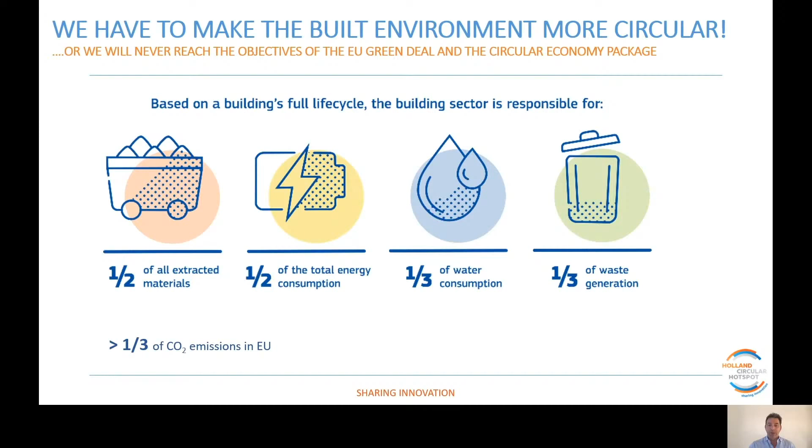Because let's face it, the built environment accounts for 50% of all extracted materials. It accounts for more than half of total energy consumption, more than a third of water consumption, a third of waste, and frankly speaking, also more than a third of carbon dioxide emissions in the European Union. We have to build back better, including the built environment.

And we think that circular economy is the way forward. Circular economy is about value preservation. Now, how could we visualize that?

Imagine that we combine materials, creativity, and energy. It's like pushing a ball up on a hill. It's about creating value with the materials we use, the products we manufacture, with the brands. Now, what typically happens is that when this material has a value, at the end of its lifetime, the value disappears. It rolls down the hill, to visualize it a bit. It's lost forever. And if you think about the plastic soup, it creates even a negative environmental value.

But what if we were to capture that value and keep that value at the highest possible level? By keeping it in circulation much longer, a longer use, or by reusing it, by sharing it. And if we can't do that, by repairing it, remanufacturing, refurbishing it. And the last thing in a circular economy is recycling, because then we're only using the material value and not the functionality. To do this, we're talking about another way of designing, another way of producing, another way of using, another way of dealing with waste. It's a system change.

Now, particularly in the Netherlands, I have to say this concept fits us very well. We had to work together in the Netherlands to keep our feet dry. Our country shouldn't exist. We had to keep our country livable. We were early industrialized, very densely populated, an agriculture superpower. We had to work together to keep our environment safe and clean. And for a country that doesn't have natural resources, it makes sense to keep materials in the loop as long as possible. It made us collaborative and it made us innovative.

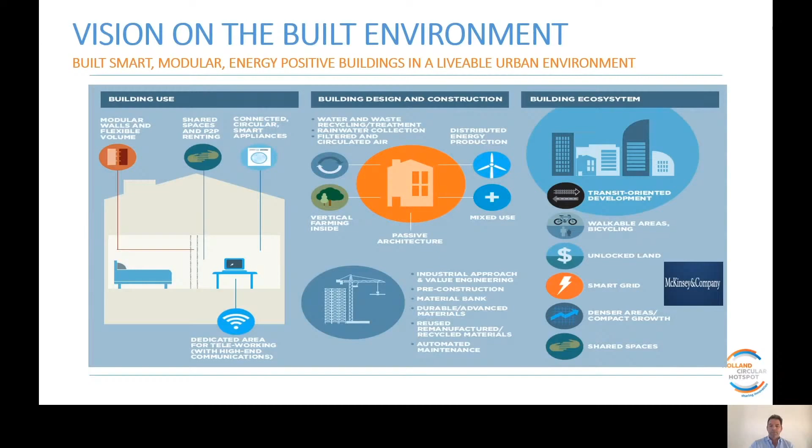Now, what does it mean? It means also that we have to focus on the overall lifetime of a building.

Typically now we focus a lot on the building phase, but if you talk about the cost, you have to talk about the total lifetime, because the usage phase determines 5 times the total building cost. In a circular design process, you look at the whole phase, not only the CapEx, initial investment, but also the OpEx, the cost of operations. By going circular, the total cost of ownership will be less and the residual value will be higher.

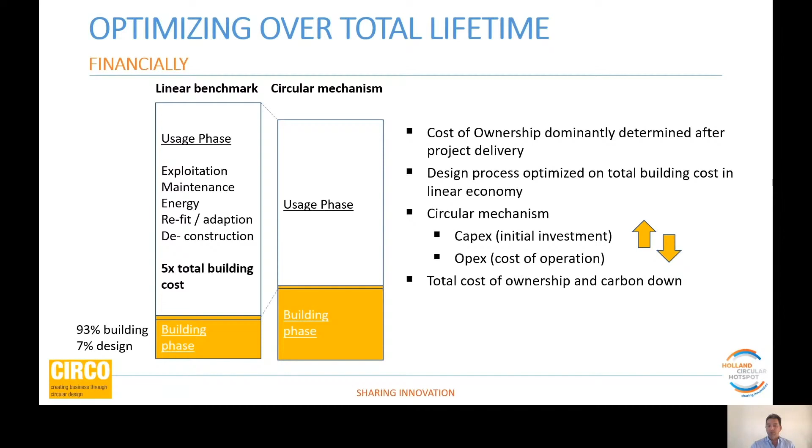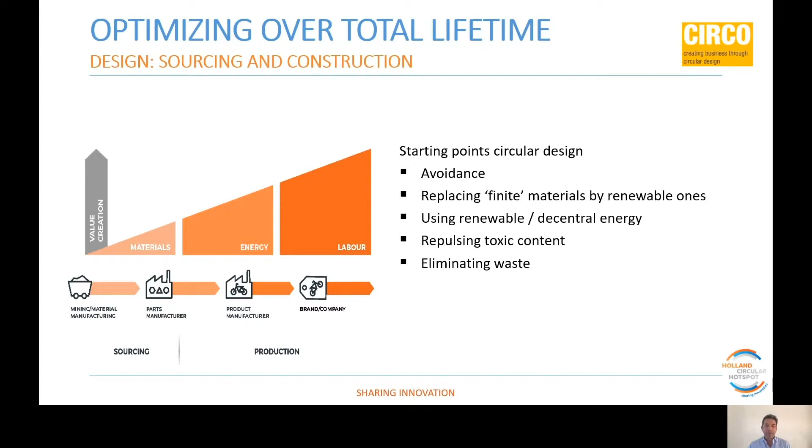What can you do in the beginning of the value chain, the sourcing and construction phase? Well, of course, you can avoid materials. You don't work with finite materials, but use renewable, bio-based materials. Your energy in the circular economy is renewable. You avoid toxic materials, which prevent making loops, and you eliminate waste right from the start.

Going further after the design, you can do lots of things as well, because in the design you can anticipate the reuse of materials and products. You make sure something can be repaired easily, that there will be effective facility services, that the building is modular, so you can change functionality if society has changed—maybe less demand for offices, but more demand for student rooms. And you implement circular business models like buildings as a service.

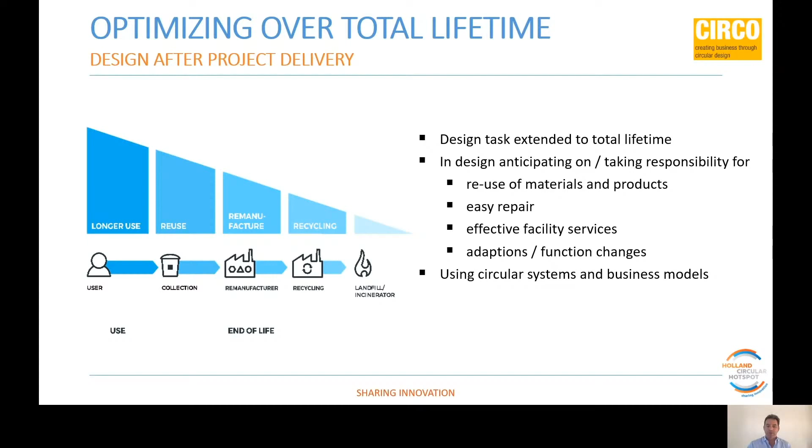We can talk a lot about this, but it will mean the concept will be different. The role of the architect will be different. It's not just the built environment—he has to think about the whole lifetime, the sourcing, the production, the use phase, and the end of life phase.

He has to communicate and create collaboration. He's a change agent, a design leader, a construction lord, an exploitation manager, and a reconstruction lord. And who knows, he might also be the data manager. So it's complete control of the whole process.

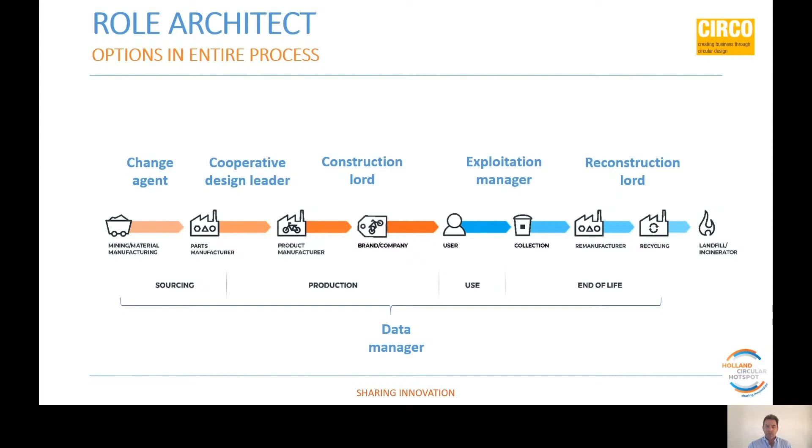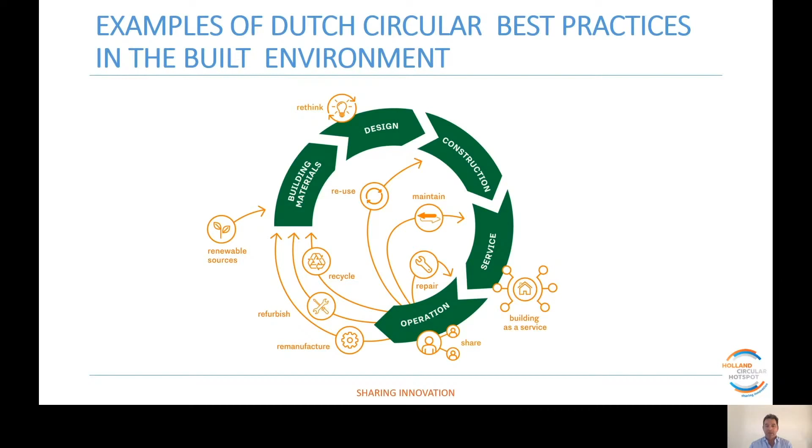We as Holland Circular Hotspot have noticed that there are examples everywhere in the built environment, from the beginning of the value chain all the way to the end: renewable materials, design best practices, buildings as a service, reuse, repair, remanufacture, refurbish, and recycling. But what's better than just sharing some examples with you?

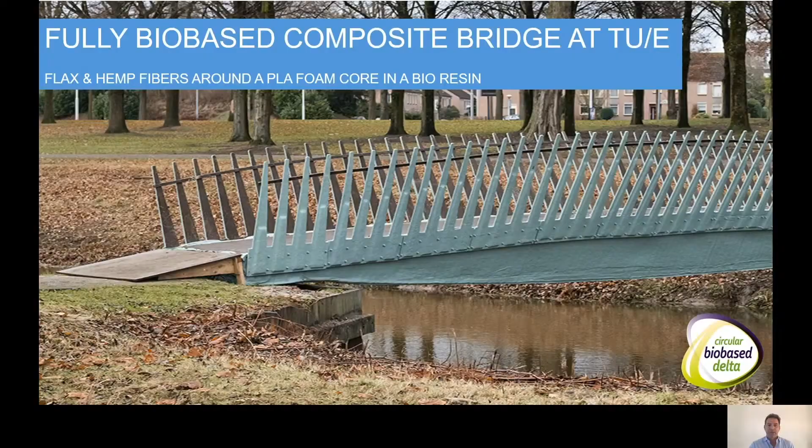Very essential if you want to think about the future are also material passports. If materials have an identity, you know where they are and can recover them. Then we're not talking about demolition at the end—we're talking about selective dismantling and reuse of materials. This is a crucial idea for the future, for keeping materials longer in circulation.

Let's go to some really fascinating buildings where they have applied circular economy in practice. This is the Venlo City Hall. It's designed according to the cradle-to-cradle and circular principles, and really, it was the first place where the architect was thinking about the whole life cycle.

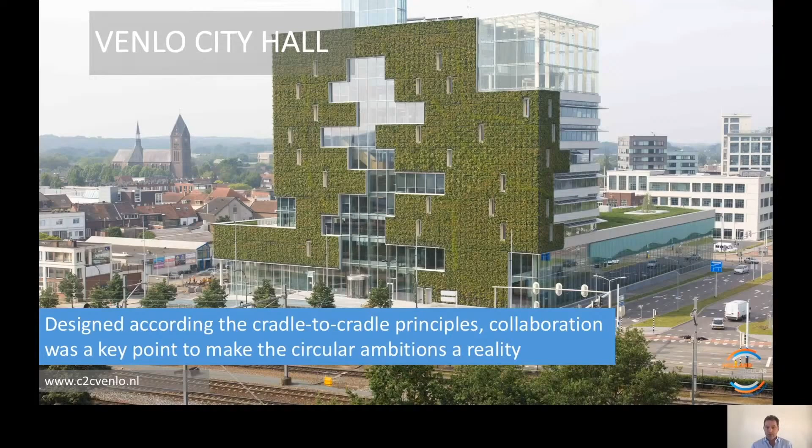This building is not only about being completely energy neutral or energy positive—it's also about the quality of life, that people enjoy working there, that there is less illness. Did you ever calculate what 1% less sickness leave would mean on your check as an owner of the building? It's fascinating. Let's move to another example.

The most sustainable building in the world is The Edge in Amsterdam, the office of Deloitte. It has the highest BREEAM score ever, combining solar energy and heat pumps to aquifers. But this building also uses intelligence—it knows when people are present and can adjust all systems accordingly, creating a combination of circular principles and energy saving.

What about the first cradle-to-cradle business park in the world? It's Park 2020, designed for dismantling. It has a material passport, light as a service, furniture as a service—everything applied here. It has one of the highest occupancy rates you can imagine for a business park. It's pleasant to work there.

It's fun. Another of my favorites is the new headquarters of Liander, from RAU Architects. They didn't tear down old buildings and build a new fancy headquarters. Instead they reused several old buildings and made a new office using 80% of the materials they could find in the old buildings, and covered all 7 buildings with a roof.

This roof is fascinating because it's based on the design of a Luna Park, since Luna Parks are designed to be dismantled after a certain time and built up again. So design for dismantling is fascinating here too. It's a very light, pleasant building with lots of green elements as well.

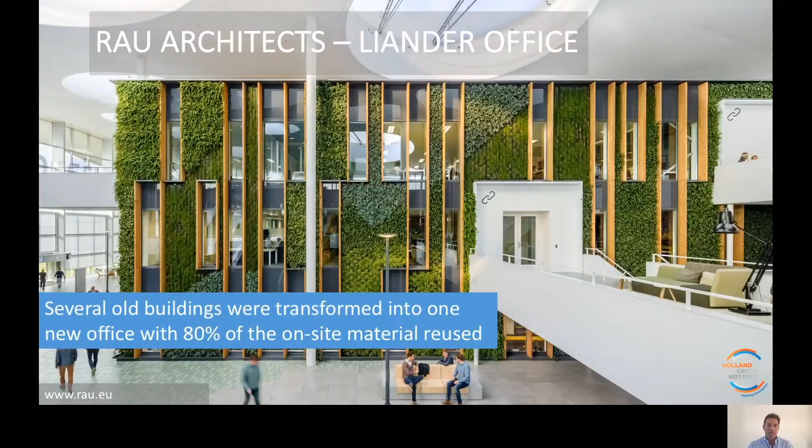In front of the headquarters of ABN AMRO, there's the Circle Pavilion. ABN AMRO is a bank with a large real estate portfolio, and they want to inspire their customers to go circular too. If you look at this building, it has a lot of circular elements—look at the wooden beams, the frame replacing concrete.

It has an elevator as a service, insulation made from old jeans, and a service concept where they use direct current instead of alternating current, saving lots of energy in transmission. Another fascinating place to be.

Of course, I shouldn't forget our own company, Holland Circular Hotspot's headquarters in Sibeta, which is a circular business center. It's a repurposed old farm, 125 years old, now an exposition room, with all kinds of circular materials—circular tapestry, circular heating—and it's an inspiration place for everybody.

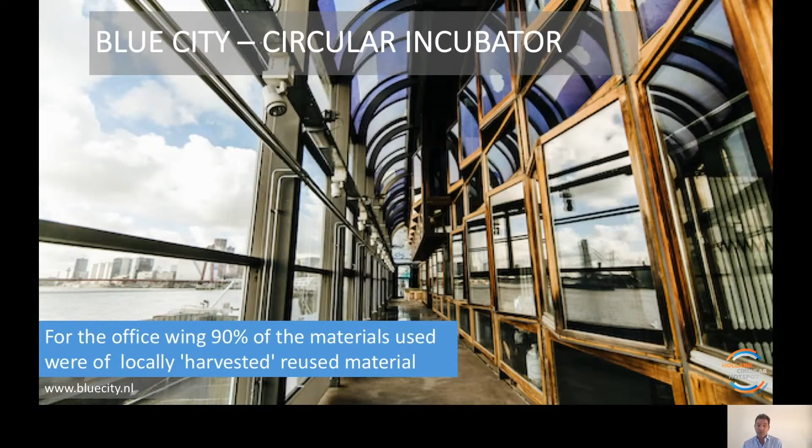Another old tropical swimming pool in the Netherlands, Blue City, has been turned into a circular incubator hub. In the office wing, 90% of the materials used were locally harvested as reused material.

We have hotels which are circular, like QO in Amsterdam. What's nice to mention is that we don't need just buildings that are a show-off for a company—we need to scale up. So what if we were to make social housing circular? Now we're experimenting a lot with that.

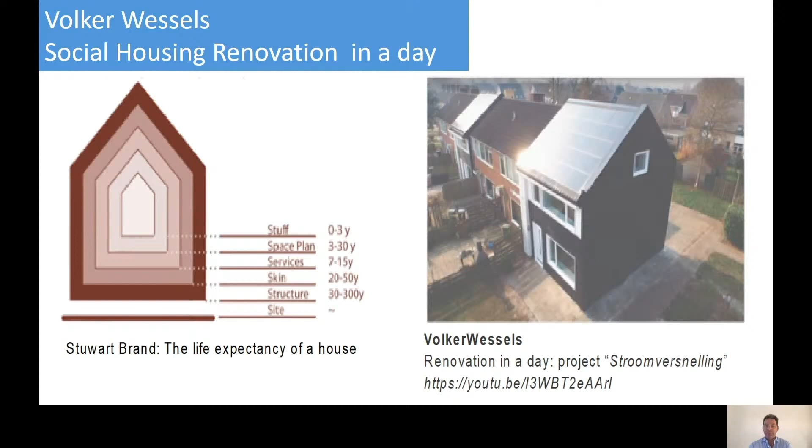If you look at social housing in the Netherlands, lots of it was built after the war, and looking at the outside of the building, it's at the end of its life and has to be replaced. In a project called Stroomversnelling, they actually replaced the outside of the building in 24 hours. It's fascinating that it can be done, and from a very energy unfriendly building, all of a sudden it's an energy neutral social housing complex.

If we enter a further phase, the waste phase, imagine jeans—I'm wearing one right now. You can wear jeans, share jeans, repair jeans, but then there comes a moment you cannot use them as jeans anymore, though they're perfectly suitable as insulation in a wall. That's what happened, for instance, in Circle from ABN AMRO, where textile fibers are processed into sound-absorbing, moisture-regulating paste applied to walls and ceilings.

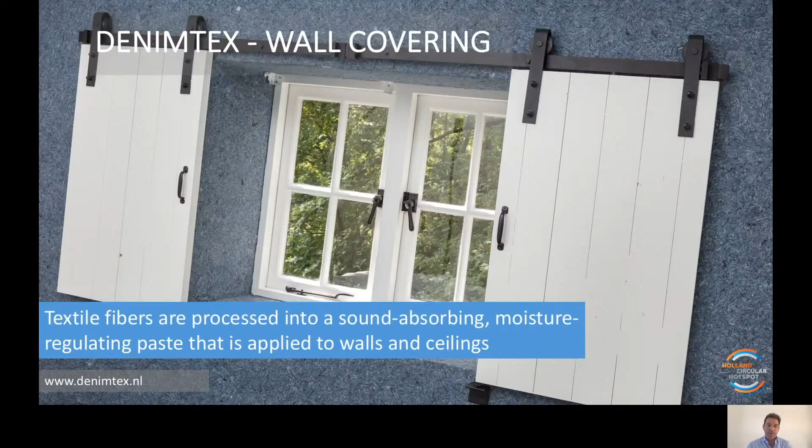Now another circular example which can have a huge impact is the smart crusher. It's about concrete recycling, especially the cement fraction, because that's the most energy intensive part. Given the building challenge we still have—the cities of tomorrow still largely have to be built—what if we could reuse cement, this energy intensive part of concrete? It would save a tremendous amount of carbon dioxide. This is definitely an innovation to follow.

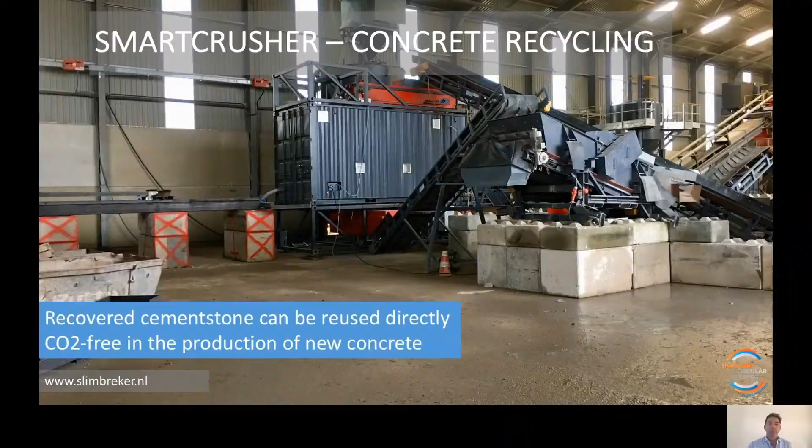Lots of examples—we have to stimulate that. We want to build back better. We want to go circular in the built environment. Wherever you go around the loop of the built environment, the value chain, there are lots of things that the regulator can do.

It's about recognizing each other's standards, tools, and labels. It's maybe about extended producer responsibility for buildings. Could buildings be part of the emission trading scheme in Europe if they are so important for carbon dioxide emissions? It's about access to financing for new circular business models, and creating a pull factor so people start to procure more circular buildings. It's about solving how waste can become a resource again by aligning waste regulation and chemical regulation.

Could we stimulate it by setting mandatory targets for recycling in buildings? Make material passports for new buildings obligatory. And it's about life cycle thinking all the time in terms of carbon dioxide, resource efficiency, health aspects, and total cost of ownership. We can do a lot, and we can do it now.

That's basically how I want to conclude, because closing the loop for buildings and materials is happening today. Front-running businesses are showing it and embracing it. It can happen in the Netherlands, it can happen in Vietnam, it can happen in Ghana, it can happen in Canada, everywhere. It's an opportunity—about future markets, about continuity—but we need to scale it up, and fast. Time is running out. We have to build back better, and we need all of you on board.

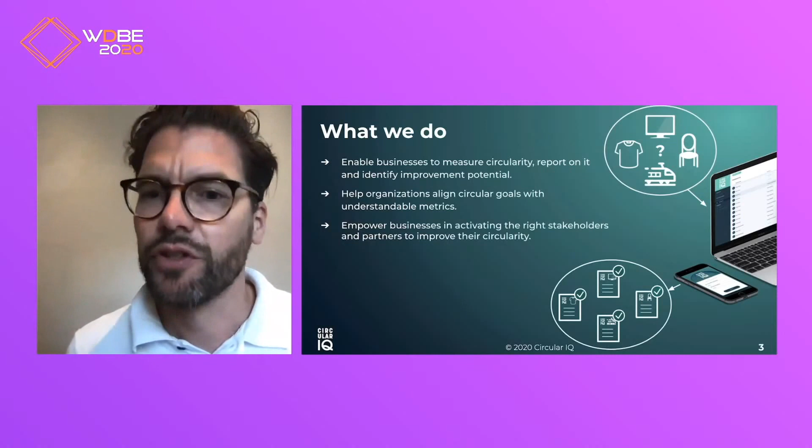Our customers are mainly sustainability managers, procurement officials, and directors, working for the top 20 leaders in chemicals, consumer products, construction, high-tech, packaging, and plastics.

Today, our world is only 8.6% circular, and our consumption patterns continue to escalate, causing acute resource depletion and a massive waste problem. This means that governments and businesses feel a massive impact on their profitability, and they need to act now. The challenge is, how can you manage and change what you don't measure?

That's where our software comes in. Our digital solutions and services help businesses to know what's in the products that they buy, source, and/or produce, to find key areas for improvement based on eco-impact and circular performance, to prevent waste, and to prevent resource depletion by activating their value chain to increase recycled content.

We offer 3 programs that help businesses in activating and increasing their circularity. Our programs support the goals and strategies of businesses throughout different sustainability maturity levels and sectors. We offer complementary pathways to implementing and activating your circularity through circular procurement, circular transition indicators, our CTI tool, and through circular product improvement programs.

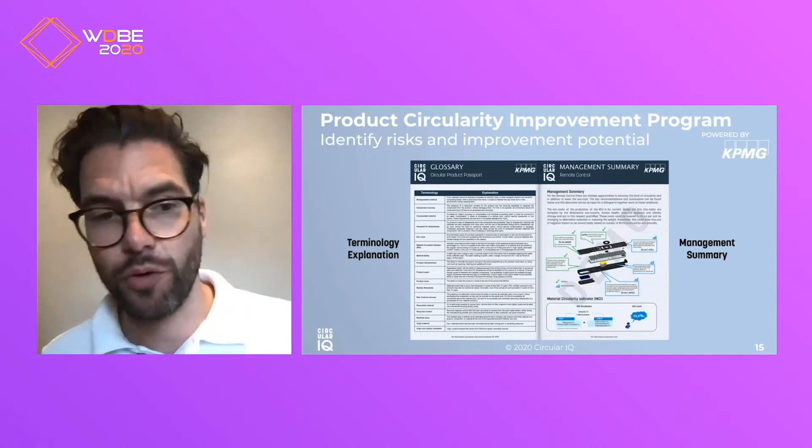Our Product Circularity Improvement Program. This is our third program. Together with our partner KPMG, we map and frame a product's eco-impact as well as its circularity characteristics. We provide in-depth and data-backed insights for the biggest circularity and eco-impact improvements on a product level. We help businesses understand exactly what is needed to achieve their sustainability goals and track performance and incentivize suppliers to improve their circularity and eco-impact.

What is our traction? Our partnerships with WBCSD and KPMG put us in a unique position in supporting businesses to transition towards products and production processes that are fit for the circular economy. Our primary focus for 2020 is to activate WBCSD or Ellen MacArthur Foundation members and the top 20 businesses in the sectors I mentioned. Despite the current COVID-19 crisis, we continue to see growth.

Since the launch of CTI Tool in January, we have issued over 400 accounts in over 50 countries all over the world with CTI Tool alone. So far, we facilitated the reduction of thousands of tons of virgin material and thousands of tons of CO2 emissions.

Our strategy is to become a market leader in circular economy data management, first in Europe and then worldwide, so we can increase our positive impact even further. Thank you very much.

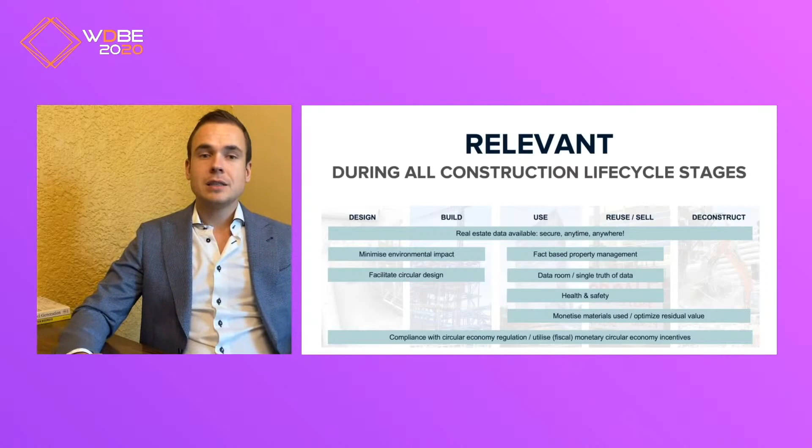In conclusion, Madaster has developed a platform to eliminate waste, and waste can be eliminated by giving materials an identity. Madaster is governed by a not-for-profit organization that governs all data and public availability of anonymized data.

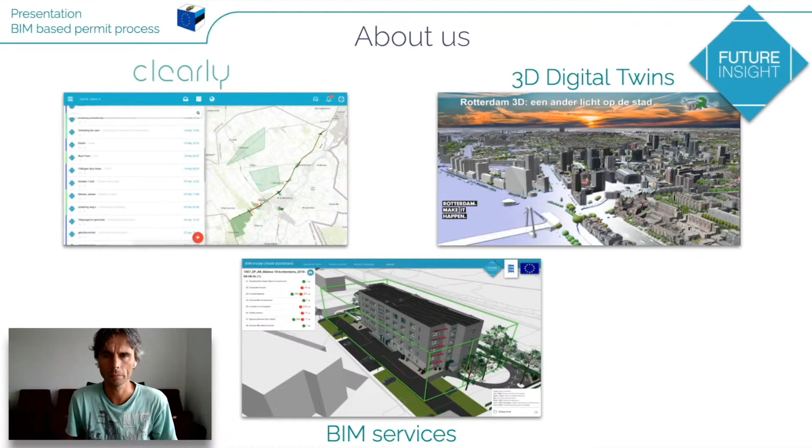We provide three services aligned with each other: the 3D digital twin, our BIM services, and Clearly, our online collaboration platform for spatial projects. It's a combination of 2D and 3D maps where you can visualize all your project data and make it easily available for all stakeholders. There's also a fully integrated workflow management module, making it possible to organize your working processes and show the current status on the map. You can even include all your files within the process, bringing all relevant information together in one item.

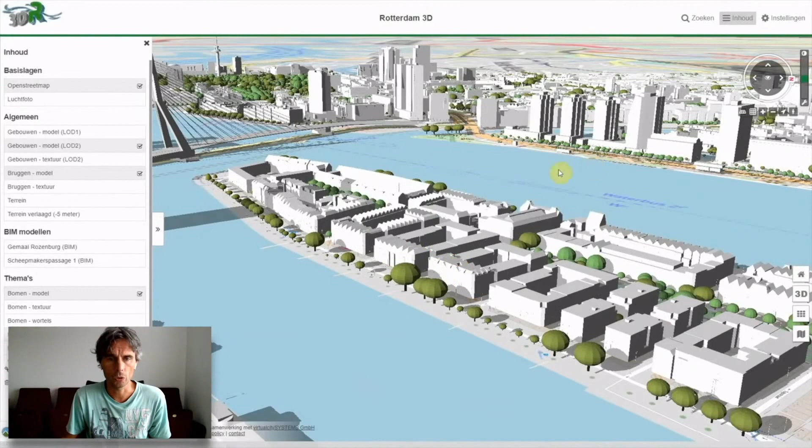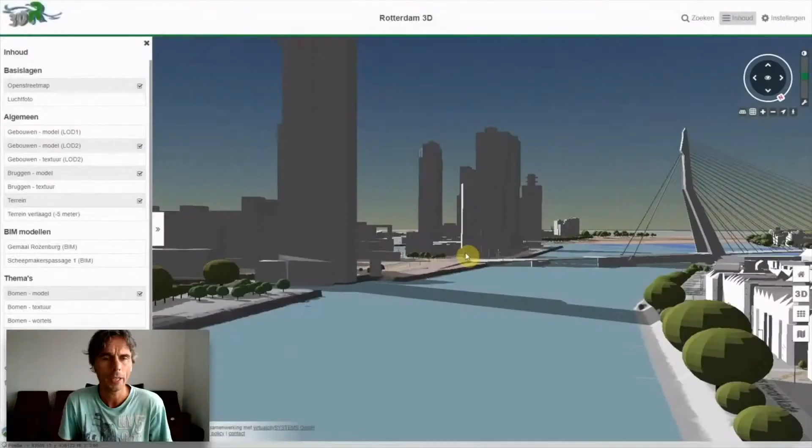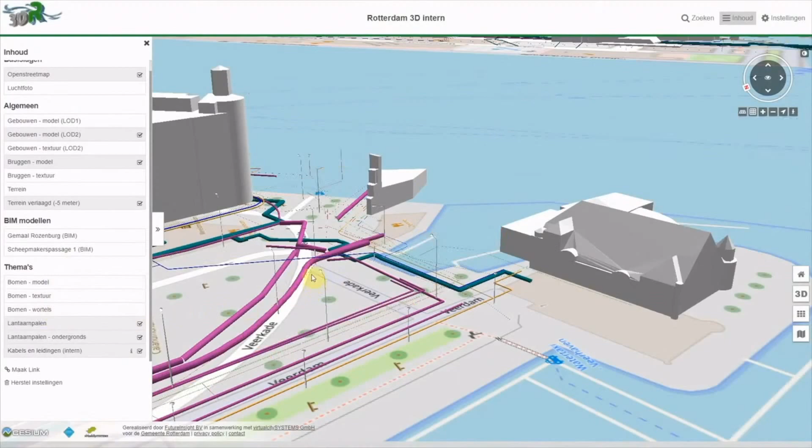Then there's the 3D digital twin, which we host for example for the cities of Rotterdam and The Hague. We even have it for the whole of the Netherlands. It's fully web-based and based on the open CityGML standard, making it a good foundation for future smart city developments. It's possible to store and serve all levels of detail, even really detailed and textured 3D buildings made available online. It's not only about buildings, but all objects in your city, like trees, lampposts, and underground utility networks. We can even attach real-time information like free parking spaces or traffic intensity.

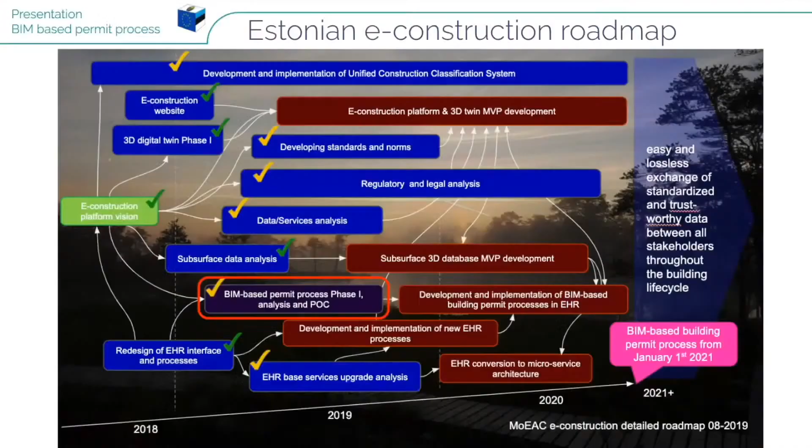Now let's go to the topic we're all here for: the BIM-based permit process proof of concept we developed for the Ministry of Economic Affairs and Communication in Estonia. This is an image of the roadmap leading to the whole e-construction workflow, which also consists of setting up the 3D digital twin for the whole of Estonia and taking a good look at the rules and legislation.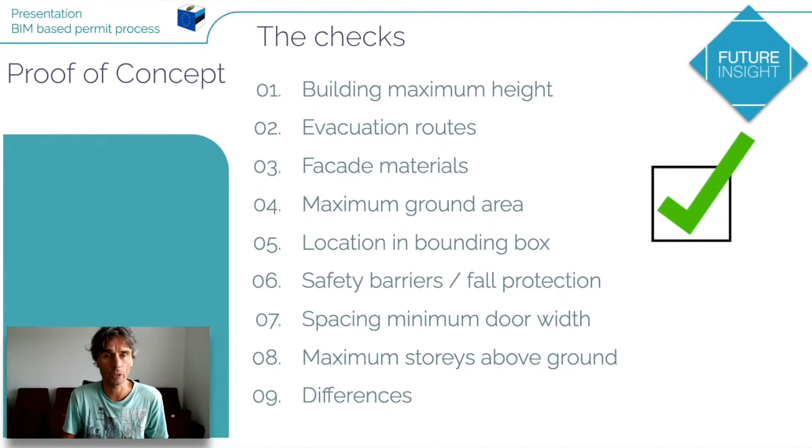We've specified nine checks, all listed here. Some are pretty easy, like the building maximum height, and some are more complex, like the evacuation routes and safety barrier checks. Let's quickly have a look.

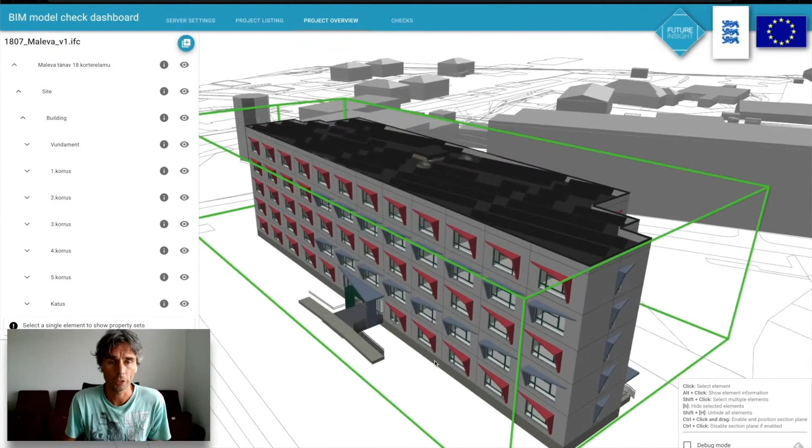Since everything is web-based, you start by going to a website. After logging in, you can add a design to be checked using the plus button. It's automatically stored in an open BIM database and added to the list of projects. The different checks are automatically started in the background. When you select a project, it's visualized and shown in its direct surroundings. The green box represents the zoning plan, which the design is also checked against. You can easily turn on different floors and even define your own section planes interactively.

Going to the Checks tab, you'll find the results of the automated checks, sometimes in text and sometimes with highlighted objects, depending on the results. In this example, doors which are not wide enough are detected. When you select one, it automatically zooms in and highlights the door. For the safety barrier check, a voxel-based approach was used, which walks through the building and detects where you can fall down. It adds a new element at those places, like here at the elevator shaft.

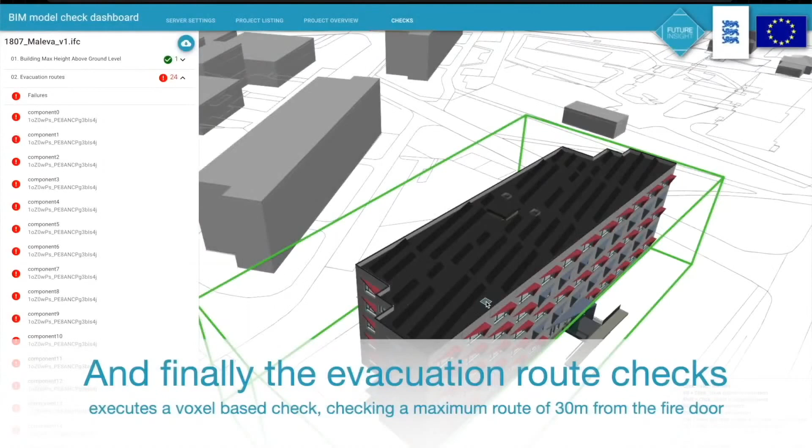Finally, here are the results of the evacuation route check, where we also used the voxel server. As you can see, we checked for a maximum of 30 meters from the door near the central hallway. Green is good and red is fault. The idea is to be able to download the errors as BCF, so you can fix them within your own BIM authoring tool.

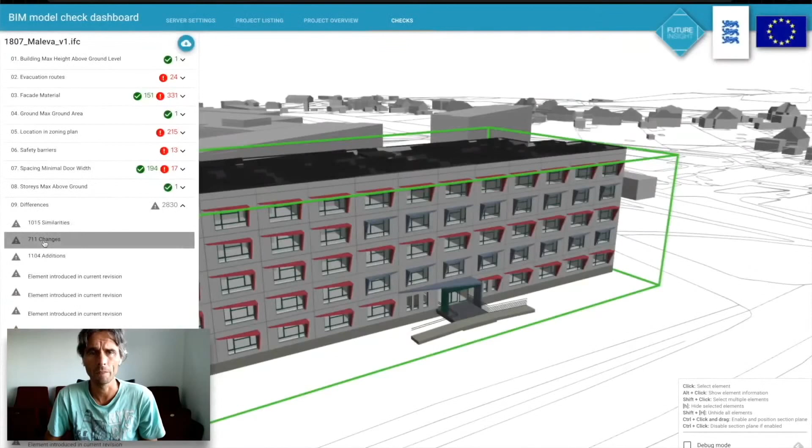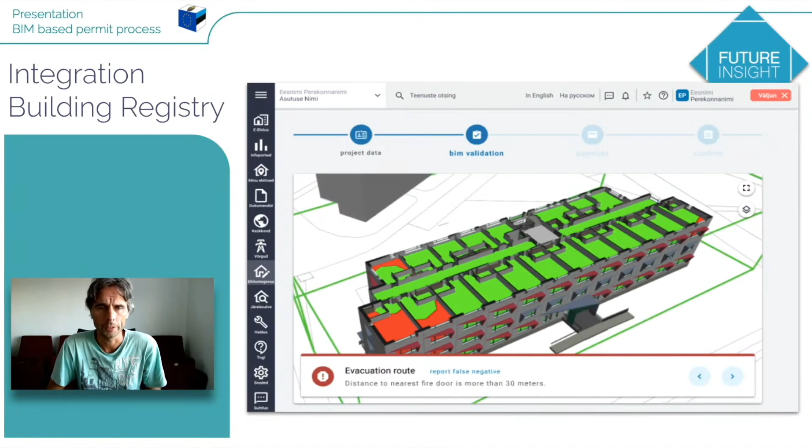The next step is to integrate the solution within the Estonian building registry. This way it can connect to all processes which already exist and start whenever needed. Since it's fully open and web-based, you can reuse it wherever you want. And the cool thing is this is all really going to happen. In the past few months, Estonia put the tender for this job on the market, and we won, together with Reach-U, our local Estonian partner, which means we're really going to implement the solution in the upcoming months in the Estonian e-construction platform.

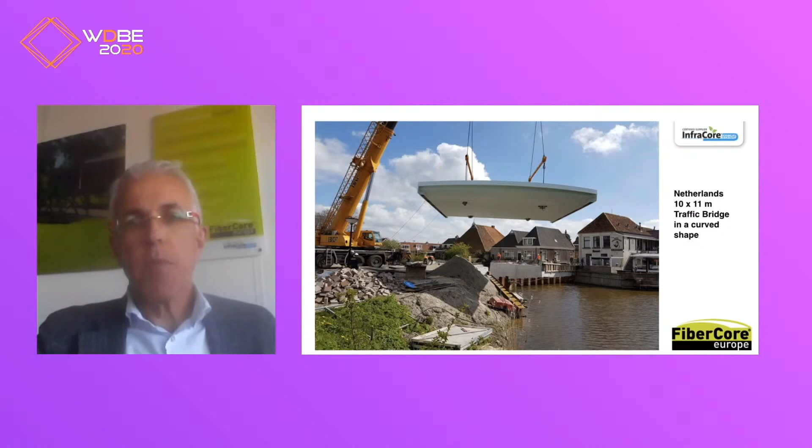All our constructions are very lightweight, which is very important for an easy and quick installation, in most cases within half an hour.